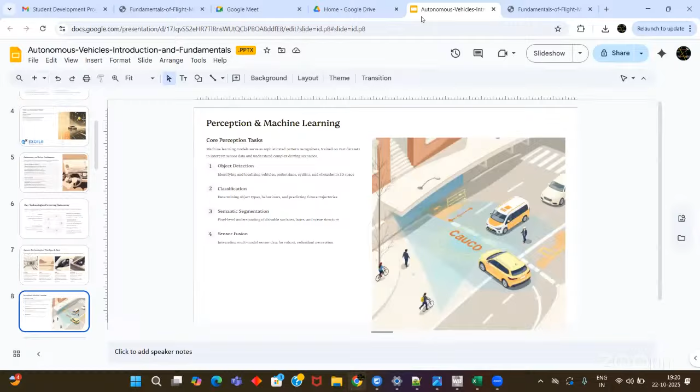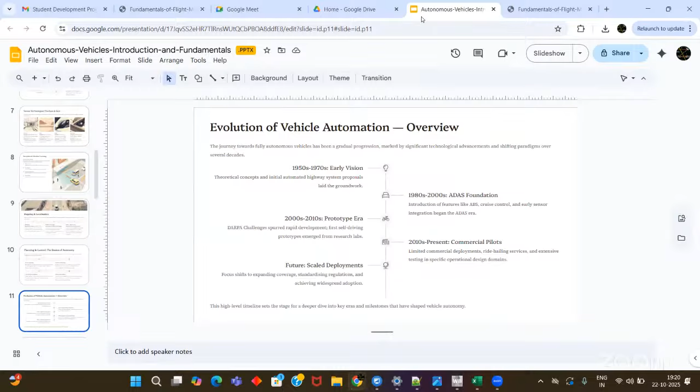Then planning and control, the brains of autonomy, which included route planning, behavior planning, trajectory generation, low-level control. That got subcategorized into global level and local level. Then we discussed the evolution of vehicle automation, from the early 1950s to current times and future scale deployments. Then the early milestones, the modern era, the commercial research acceleration, and the research trends.

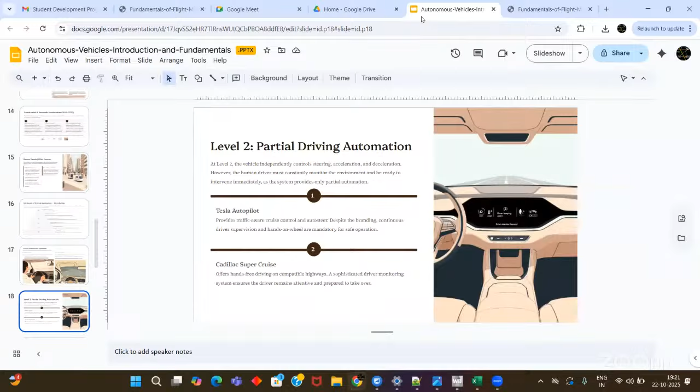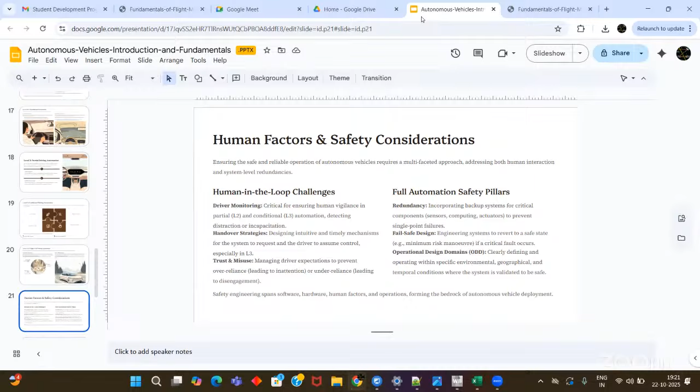Then the SAE levels, which included level zero and one, the foundational automation, then partial driving automation, conditional driving automation, and high and full driving automation. Then human factors and safety considerations, which included human-in-the-loop challenges, full automation, and safety pillars: enhanced safety, increased mobility access, economic efficiency, reduced congestion, environmental benefits.

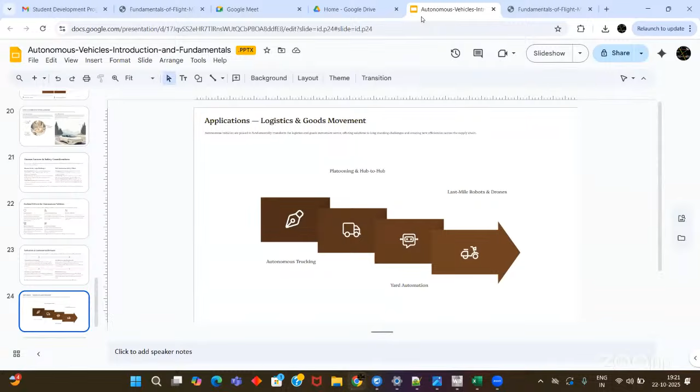So technical and commercial drivers, which included advanced sensors and compute, AI and machine learning breakthroughs, ride hailing and logistics demand, potential cost savings. So then we discussed the goods and the logistics and goods movement. So this was the complete thing that we were discussing in the last two classes. We discussed everything in detail. We also took time to understand the technical competencies that are required for electric vehicle design, the ground electric vehicle design, and its principles. So these were the things that we did in the last one.

Today's class we'll be discussing the aerial autonomous vehicles. So the aerial autonomous vehicles are the drones.

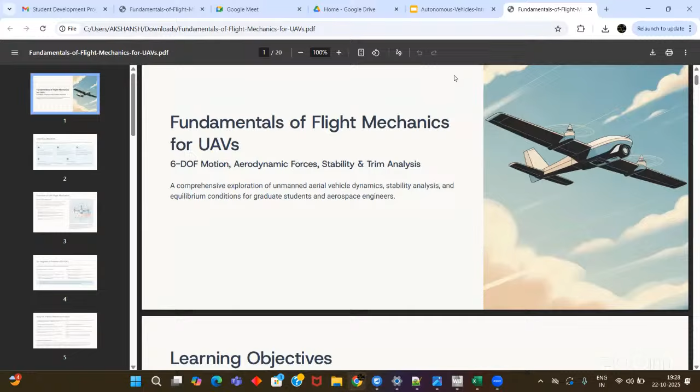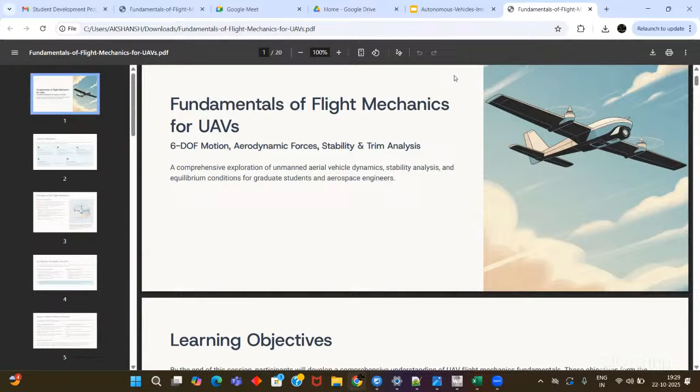So a comprehensive exploration of unmanned aerial vehicle dynamics, stability analysis, and equilibrium conditions for graduate students, be it electronic engineers or aerospace engineers. I have explained all that comes here. What is 6 degrees of freedom motion? What is an aerodynamic force? What is stability and what is trim? Those are basically a surface level of understanding of the moments and forces which are needed for aircraft and flight dynamics analysis.

Now the learning objectives. By the end of the session, participants will develop a comprehensive understanding of UAV flight mechanics fundamentals. These objectives form the foundation for advanced control system designs and autonomous flight operations. So basically, complete understanding of the flight mechanics helps you understand the control algorithm and, at a later stage, helps you design a fully autonomous flight control system. Everything is linked, and it lays a foundation in a proper networking manner, wherein you get a proper understanding of each concept and then take it into consideration in designing an autonomous flight operation.

So an autonomous flight operation is actually the design of a Pixhawk or a flight control system, which has different breadboard layers, coded using embedded C programming, wherein you can plug in your Pixhawk, make changes, track it, and make algorithm changes which will benefit your moments and forces and your flight operations. That governs the autonomous flight regime of the complete profile flying in air, and it will govern the complete system in a proper manner.

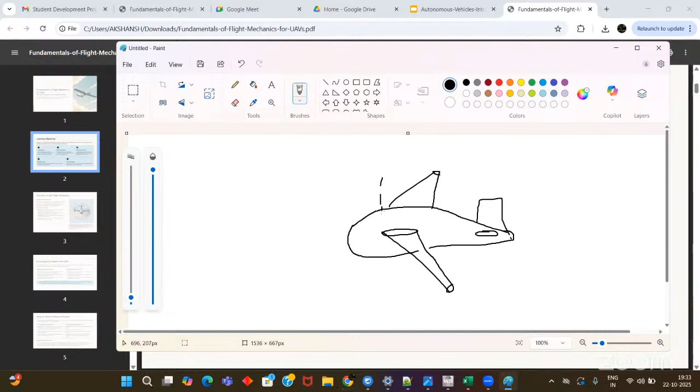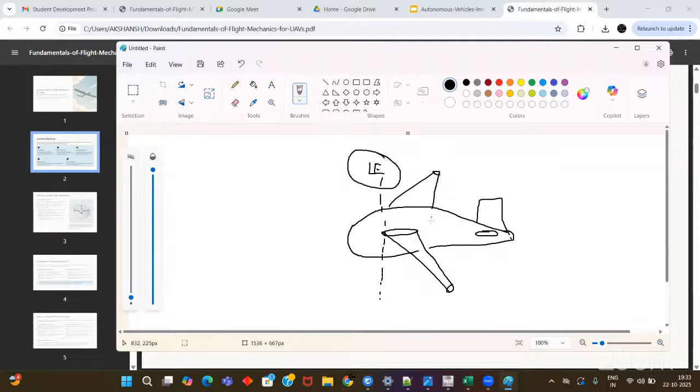So suppose this is your aircraft, and this is the leading edge of the wing. And this is the center of pressure or the aerodynamic center, where you observe and calculate your CL and CD, which we will do in the next class. This is the coefficient of lift and this is the coefficient of drag. These two are the aerodynamic parameters, and then you also observe the moment. This is the pitching moment CM.

This is the roll axis, and this is CM, and this is the yaw axis, that is CN. Sorry, this is CL, roll axis, and this is small l. So this is C and small l.

So basically, if you draw your axis here, so this is the Z axis, this is the Y axis, this is the X axis. Sorry, this is the Y axis, and this is the Z axis. So along the Z axis, the motion which is there is the yaw motion. Okay. Along the roll axis, the motion which is there is the roll motion, CL, small l. And the motion along the y-axis, which is there, is the pitch motion.

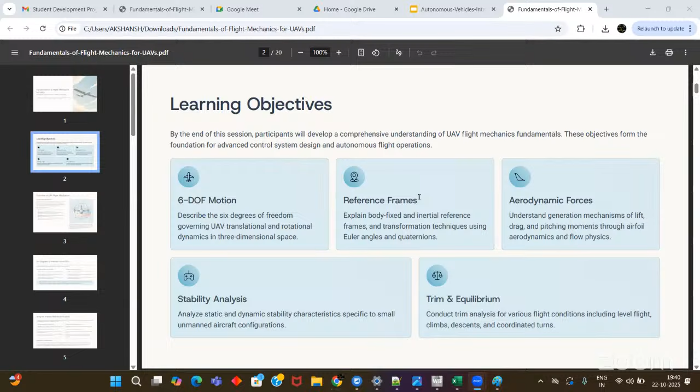So the first one is the trim that we already discussed, that in the pitching axis or in the longitudinal axis, an aircraft is trimmed properly. So trimming happens through an elevator. So you see it here. This is the horizontal tail, and the control surfaces here are the elevators. This is the wing, and the control surfaces attached to it are ailerons and flaps. So these are the ailerons, and these are the flaps. Okay. Then this vertical portion is the vertical tail, and this control surface attached to it is the rudder.

So here, the one that we are discussing is conducting a trim analysis for various flight conditions, including level flight, climbs, descents, and coordinated turns. So in this condition, actually, the flight profiles are... yeah, so we have discussed the trim part, right? So how the trimming of the aircraft actually governs the entire profile. The second one is including the level flight, then the climbs.

So climb is actually when the aircraft moves upwards in the air without changing the angle of attack, but the entire pitch of the aircraft moves up. So the entire aircraft, let me show you. So the aircraft moves like this. So this is the axis and this is the angle that it moves. So it moves up. So that is actually climbing up. Then a steady state level flight is actually when it moves forward, cruising, and that is the case.

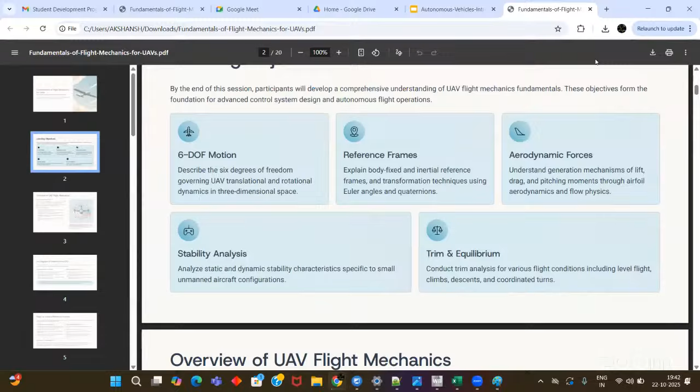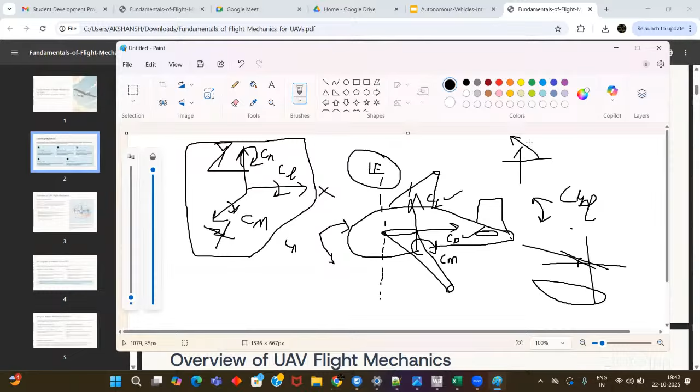And third is the descent when it comes down during the landing, and the coordinated turns. So during the banking, when the aircraft actually moves like this, turns, coming under the banking portion.

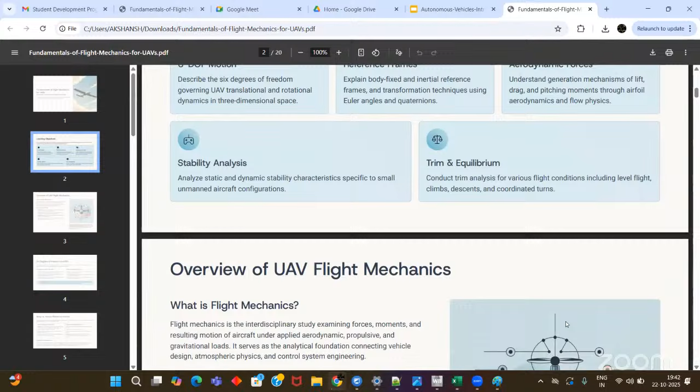Okay. So now we'll be discussing the overview of UAV flight mechanics. So, what is flight mechanics basically? Flight mechanics is the interdisciplinary study examining forces, moments, and resulting motion of aircraft under applied aerodynamic, propulsive, and gravitational loads. So flight mechanics is the interdisciplinary study which helps you to examine the forces, moments, and the resulting motion of the aircraft when the aerodynamic, propulsive, and gravitational loads are applied.

So it serves as the analytical foundation connecting vehicle design, atmospheric physics, and control systems to achieve autonomy in the engineering part. So all these things are clubbed together and make flight mechanics. Flight mechanics is not a very easy subject. I actually worked in flight mechanics. I am a flight mechanics engineer. It comes with a lot more understanding of different physics-based topics, including the design, the aerodynamics, the atmosphere physics, the control system, the autopilot, everything. We have to have an understanding of propulsion. Everything is needed.

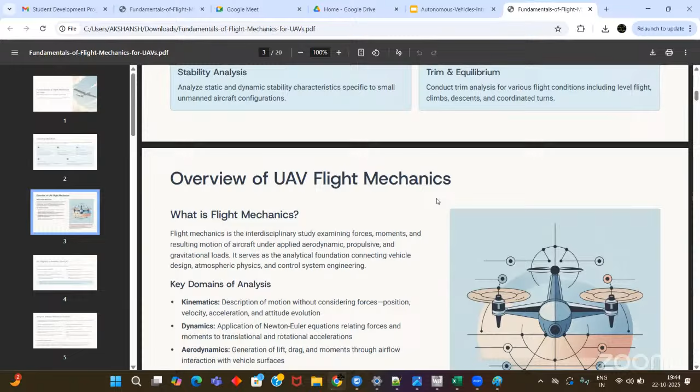So, what are the key domains of analysis? First is the kinematics: description of motion without considering forces, position, velocity, acceleration, and attitude evolution. These come under kinematics. Then comes the dynamics. Dynamics is the application of Newton and Euler equations relating forces and moments to translational and rotational accelerations. So these come under dynamics.

Now comes the aerodynamics part. The generation of lift, drag, and moments through airflow interaction with vehicle surfaces comes under aerodynamics. So aerodynamics is nothing but the evaluation and generation of lift, drag, and moments through airflow interactions with vehicle surfaces.

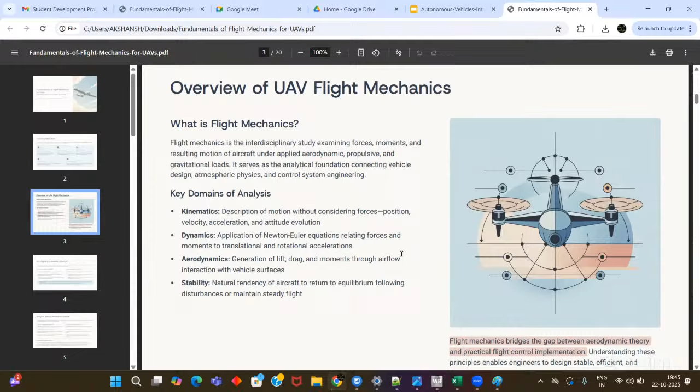Now comes the stability. Stability is the natural tendency of the aircraft to return to equilibrium following disturbances or maintain a steady flight. That's what I told you, that is trim. So the stability condition is important to evaluate and maintain the natural tendency of the aircraft to return to equilibrium following disturbances or maintain a steady state flight.

So flight mechanics bridges the gap between aerodynamic theory and practical flight control implementation. Understanding these principles enables engineers to design stable, efficient, and controllable systems. The flight mechanics part is very important, bridging the aerodynamics part, which includes lift generation and drag, and the practical flight control implementation, which helps the aircraft attain autonomy. So flight mechanics is a club of both things. A flight mechanics engineer has to understand both things in a close and coordinated way.

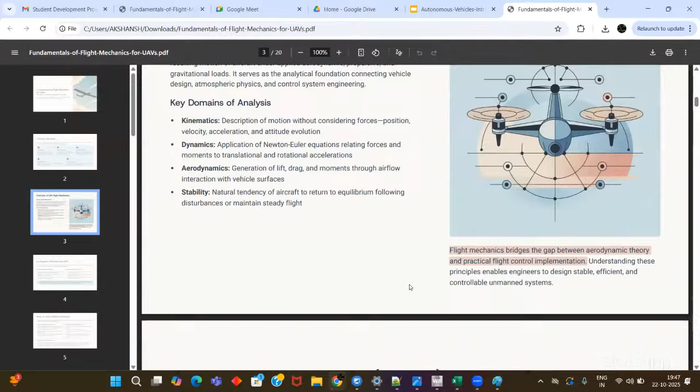The reason I'm explaining these things in an autonomy class is because they are very important to lay a foundation for your interest in automation. You'll have an understanding of what has to be learned before having a clear-cut understanding of the autonomy of the system, how to design an autonomous vehicle. Understanding these principles enables engineers to design stable, efficient, and controllable unmanned systems. Without understanding these concepts properly, you won't be able to design an unmanned system that can be controlled by complete automation or autopilot.

So now we'll be discussing what is six degrees of freedom, and everything about it. We have discussed the surface level knowledge about six degrees of freedom, and I'm not saying that I'll explain everything about it in this class, but at least I'll help you understand. Because of the time constraint and the nature of the class, which is online, I cannot help you understand the entire loop of the scenario in a proper way with equations.

But I'll try to help you understand about the same in a proper way so that you can go home and after that you can have an understanding about the same reading books. So I'll tell you different books. So you can refer to R.C. Nelson, Robert Nelson. You can write that book, R.C. Nelson. Then you can write Daniel P.

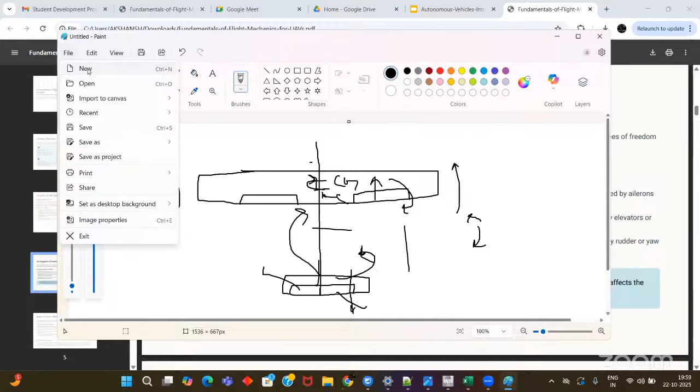So suppose this is the vertical tail, right? This is the vertical tail, and this is the rudder. Okay, so when the aircraft is seen like this, this deflects this side and this side, actually to turn the aircraft to this and this. If you view the aircraft from the back, it turns like this, and it turns like this, through the yawing mechanism.

So, critical coupling. Translational and rotational motions are strongly coupled in UAV dynamics. For example, a pitch rotation directly affects the heave velocity, whereas roll rotation influences both sway and yaw rates through aerodynamic cross coupling effects. So, that is it.

So you can ask questions for 2 minutes. I'll wait for 2 minutes, and then you can post your questions if you have. Otherwise, we'll move forward. Yeah, please. Don't have any questions? Everything is clear. XLR team, you can hear me, right? XLR team, can you hear me? Any student, can you please respond if you can hear me or not? Co-host, can you hear me? Ishant, can you hear me now? Am I audible, right, Ishant? Okay, okay. Thank you so much.

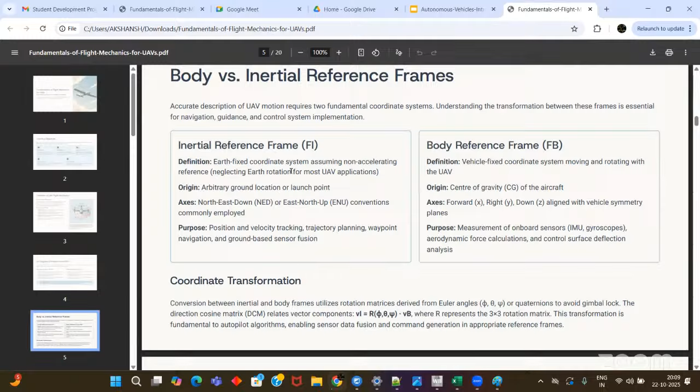Now, equations of motion. That is the overview that we are giving here. I'm telling you the physics in a very subtle manner so that you generate your own interest and study it at your own end, so that while doing an automation design of the control system, you can understand the parameters being talked about properly, and thereafter you can take decisions on how to approach the problem in a proper way.

The complete dynamics of a rigid body UAV are governed by the Newton-Euler equations, which relate applied forces and moments to resulting translational and rotational accelerations. These equations form the mathematical foundation for flight simulation, stability analysis, and control system design. Translational dynamics: Newton's second law in vector form, force equals mass into acceleration, where sigma F is the vector sum of all external forces, aerodynamic, propulsive, and gravitational. m is the vehicle mass, and a is the acceleration of the center of gravity.

In component form along the body axes, x-axis: Fx = m(u dot + qw − rv). So this is the x-direction breakup. In the y-axis, Fy = m(v dot + ru − pw). Z-axis: Fz = m(w dot + pv − qu). So this is the z-axis breakup.

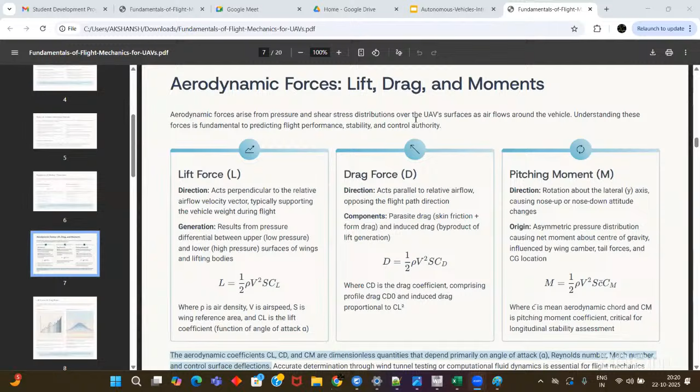Okay, so let me again do the lift curve and drag polar. So in the lift,

Stellar Ethic team, can you please say that you can hear me properly? It's a general request. I've been asking them so much of the time. They're not replying to it. So can you please tell me whether you can hear me properly or not? Stellar team. Co-host, can you please say? Huh? Sorry? Maybe you are audible. Okay, I've been asking them so much of the time to actually respond to it. You can hear me properly, right? Yes, yes, you are clear.

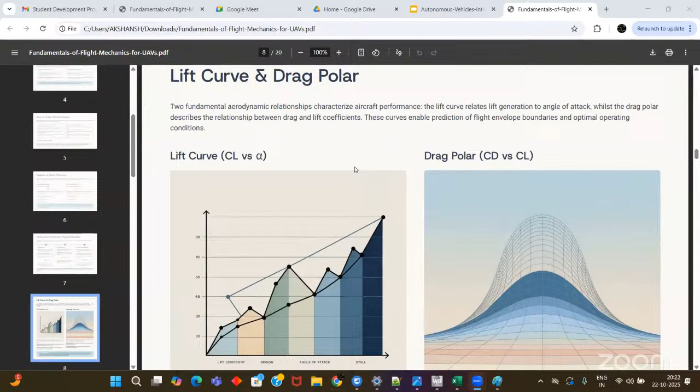Okay, thank you. So now we'll be discussing the lift curve and drag polar. Two fundamental aerodynamic relationships characterize aircraft performance. The lift curve relates lift generation to the angle of attack, and the drag polar describes the relationship between the drag and lift coefficients. These curves enable prediction of flight envelope boundaries and optimal operating conditions. So, lift curve, that is CL versus alpha, drag polar, that is CD versus CL. This is the drag polar and this is the lift curve.

Linear region: at low to moderate angle of attack, typically between -5 to 12 degrees for a conventional airfoil, CL increases linearly with alpha, following CL is equal to CL naught plus CL alpha into alpha. Lift curve slope: the derivative dCL by d alpha, typically 0.1 per degree or 5.7 per radian for a symmetrical airfoil, represents the aerodynamic efficiency. Stall: beyond the critical angle of attack, alpha stall between 12 to 16 degrees, flow separation causes abrupt CL reduction and loss of lift.

Now drag polar, or CD versus CL. Parabolic relationship: the drag coefficient follows CD is equal to CD naught plus K CL squared, where CD naught is the zero lift drag and K is the induced drag factor. Minimum drag point occurs at the CL for best glide ratio, representing the most efficient cruise condition. Performance metrics.

Maximum L by D ratio indicates aerodynamic efficiency and occurs at CL equal to square root of CD naught by K. So the engineering application of it is that the drag polar determines critical performance parameters, including maximum endurance speed, or minimum power, occurring at maximum CL power 3 by 2 by CD, and maximizing the range, that is minimum drag at maximum L by D.

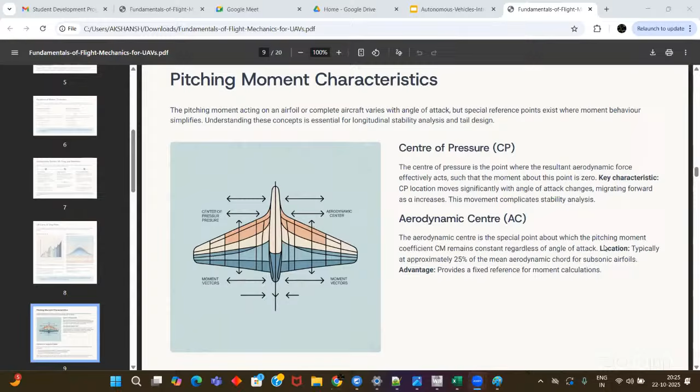So aerodynamic center, that is AC, is the special point about which the pitching moment coefficient CM remains constant regardless of the angle of attack change. Its location is typically at approximately 25% of the mean aerodynamic chord for subsonic airfoils. The advantage is it provides a fixed reference for moment calculation. So its importance for longitudinal stability is what we'll be discussing here.

The relationship between the aerodynamic center, center of pressure, and center of gravity determines the aircraft's static longitudinal stability. For positive static stability, the center of gravity must be located ahead of the aerodynamic center, that is the neutral point. The neutral point is the aerodynamic center of the aircraft. Horizontal tail surfaces generate restoring moments to counteract disturbances. The moment coefficient derivative, dCm by d alpha, must be negative. The slope should be negative.

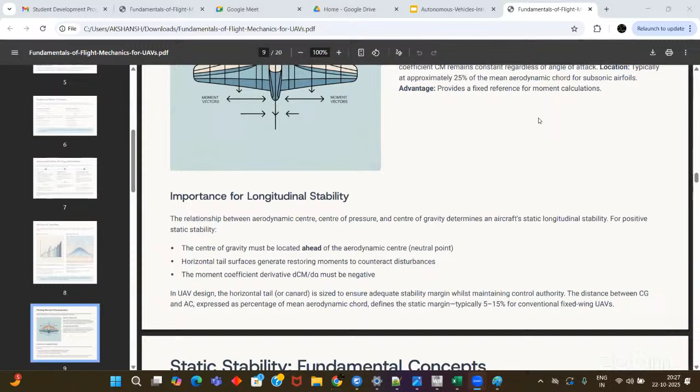In UAV design, the horizontal tail or canard, where a canard is the horizontal tail ahead of the wing and the horizontal tail is the conventional tail behind it, is sized to ensure adequate stability margin while maintaining control authority. The distance between CG and AC expressed as a percentage of mean aerodynamic chord defines the static margin, which typically should be between 5 to 15% for conventional fixed-wing UAVs.

Static stability, fundamental concepts. Static stability describes an aircraft's initial response immediately following a disturbance from equilibrium flight. It represents the vehicle's inherent tendency to generate restoring forces and moments without pilot or autopilot intervention. Stability classifications. Positive static stability: the aircraft generates forces and moments opposing the disturbance, tending to return toward the original trim condition. Example, a nose-up disturbance creates a nose-down restoring moment.

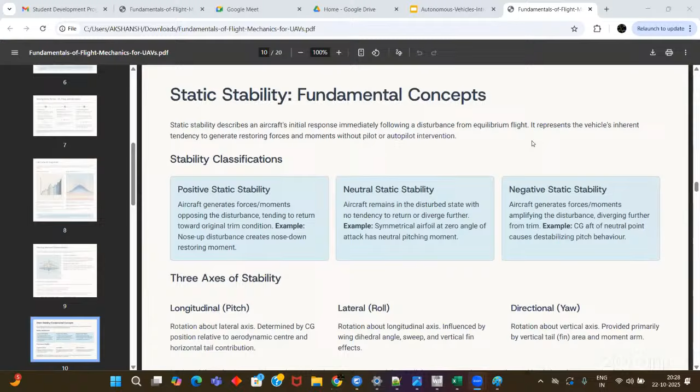Neutral static stability: the aircraft remains in the disturbed state with no tendency to return or diverge further. Example, a symmetric airfoil at zero angle of attack has neutral pitching moment. Negative static stability: the aircraft generates forces and moments amplifying the disturbance, diverging further from trim. Example, CG aft of the neutral point causes destabilizing pitch behavior.

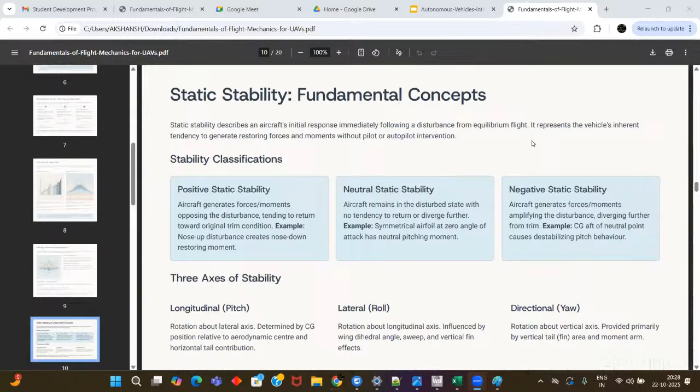Three axes of stability. First is longitudinal, that is pitch. Second is lateral, that is roll. Third, directional, that is yaw. Longitudinal, or pitch, is rotation about the lateral axis, determined by CG position relative to the aerodynamic center and horizontal tail contribution. Lateral, or roll, is rotation about the longitudinal axis, influenced by wing dihedral angle, sweep, and vertical fin effects. Directional, or yaw, is rotation about the vertical axis, provided primarily by vertical tail fin area and moment arm.

So, design philosophy: most UAVs are designed with positive static stability in all three axes to reduce autopilot workload, though some agile platforms intentionally relax stability for enhanced maneuverability with fly-by-wire augmentation. So longitudinal static stability. Longitudinal static stability ensures that the aircraft naturally resists pitch disturbances and tends to return to the trimmed angle of attack. This is the most critical stability mode for fixed-wing UAVs, directly affecting handling qualities and autonomous flight capability.

Mathematical stability criteria: an aircraft possesses positive longitudinal static stability if and only if dCm/dα is less than zero, that is, a negative slope. This condition states that the pitching moment coefficient must decrease with increasing angle of attack. Physically, when the aircraft pitches nose up, alpha increases. A negative, nose-down restoring moment must develop to counteract the disturbance.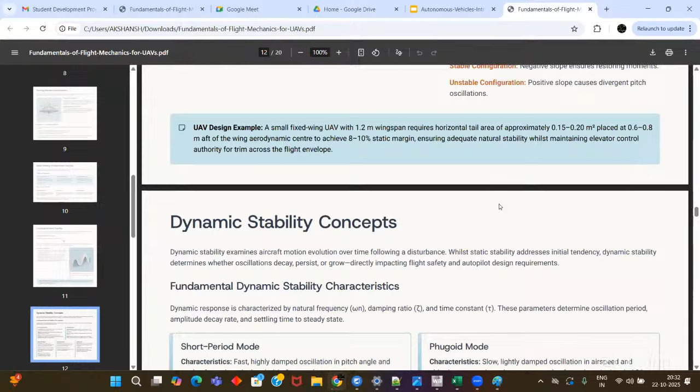Now, dynamic stability concept. Dynamic stability examines aircraft motion evolution over time following a disturbance. Static stability actually addresses initial tendency. Dynamic stability determines whether oscillations decay, persist, or grow, directly impacting flight safety and autopilot design requirements.

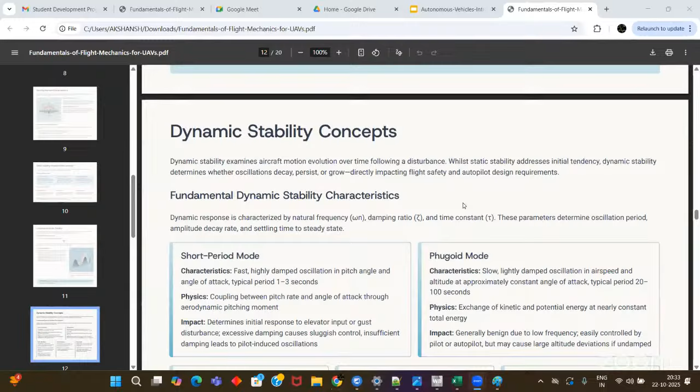Fundamental dynamic stability characteristics. So dynamic response is characterized by natural frequency omega, damping ratio zeta, and time constant tau. These parameters determine oscillation period, amplitude decay rate, and settling time to steady state. Short period mode: characteristics are fast, highly damped oscillation in pitch angle and angle of attack; typical time period is between 1 to 3 seconds. Okay, so physics is coupling between pitch rate and angle of attack through aerodynamic pitching moment. Impact: determines initial response to elevator inputs or gust disturbance.

Excessive damping causes sluggish control. Insufficient damping leads to pilot induced oscillations. Phugoid mode: characteristics are slow, lightly damped oscillation in airspeed and altitude at approximately constant angle of attack; typical time period is between 20 to 100 seconds. Physics is exchange of kinetic and potential energy at nearly constant total energy. Impact is generally benign due to low frequency, easily controlled by pilot or autopilot, but may cause large altitude deviations if undamped.

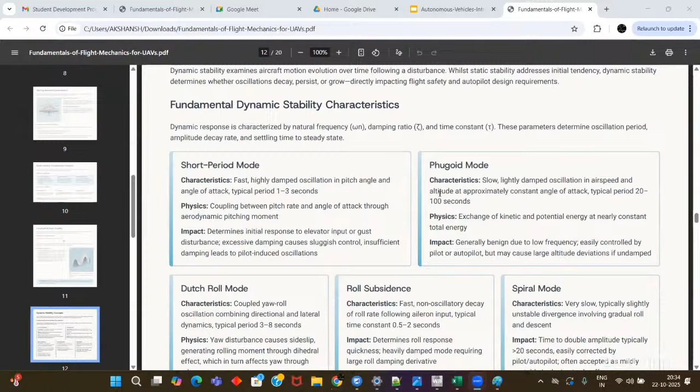So Dutch roll mode. Characteristics are coupled yaw-roll oscillation combining directional and lateral dynamics. Typical period is between 3 to 8 seconds. Physics: yaw disturbance causes sideslip, generating rolling moment through dihedral effect, which in turn affects yaw through adverse yaw. In practice, must be well damped for acceptable handling. Yaw dampers are commonly employed in autopilots.

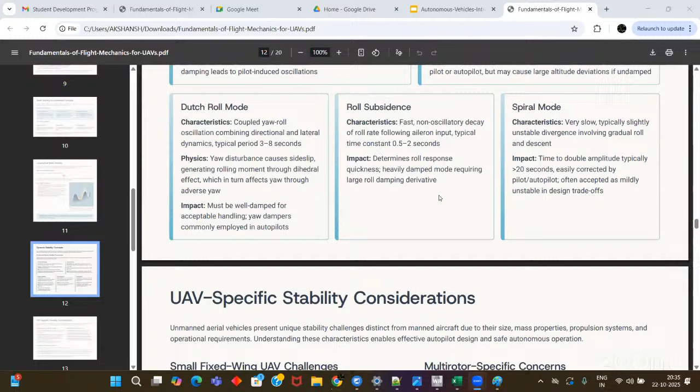Roll subsidence. Characteristics are fast, non-oscillatory decay of roll rate following aileron input. So the aileron actually controls the roll. Typically, the time constant lies between 0.5 to 2 seconds. In practice, determines roll response quickness. Heavily damped mode requires a large roll damping derivative. Spiral mode: characteristics are very slow, typically slightly unstable divergence involving gradual roll and descent. In practice, time to double amplitude is typically greater than 20 seconds, easily corrected by pilot or autopilot, often accepted as mildly unstable in design trade-offs.

UAV-specific stability considerations. Unmanned aerial vehicles present unique stability challenges distinct from manned aircraft due to their size, mass properties, propulsion system, and operational requirements. Understanding these characteristics enables effective autopilot design and safe autonomous operation. Small fixed-wing UAV challenges: low Reynolds number aerodynamics, that is Re less than 5 lakh, results in laminar separation bubbles, reduced lift curve slopes, and degraded stability derivatives. Reduced inherent damping, lower wing loading, and smaller moments of inertia lead to lightly damped modes requiring active stabilization.

High agility requirements, that is, mission requirements often favor maneuverability over natural stability, necessitating relaxed static stability with controlled augmentation. Gust sensitivity: low wing loading makes small UAVs highly susceptible to atmospheric turbulence and wind shear. Multi-rotor specific concerns: inherent instability, that is, open loop unstable in all the axes, requiring continuous active stabilization at rates

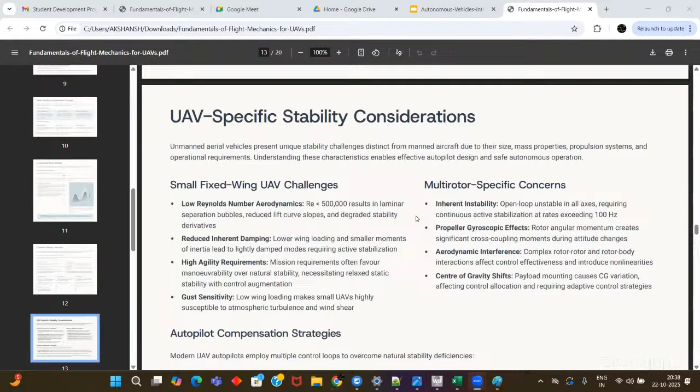So these are the things that actually control your small fixed wing UAVs and multi-rotor specific UAVs. So basically, low inherent damping, high agility requirement, gust sensitivity, inherent instability, propeller gyroscope effects, aerodynamic interference, and center of gravity shift. So these are the things.

Autopilot compensation strategies, where modern UAV autopilots employ multiple control loops to overcome natural stability deficiencies. Inner loop, that is rate stabilization: high bandwidth feedback of angular rates, that is PQR, provides artificial damping, typically operating at 50 to 200 Hz.

Middle loop, that is attitude control, maintains desired roll, pitch and yaw angles through proportional integral derivative, that is PID, or model-based control. Outer loop, that is position control, tracks desired flight path using GPS and inertial navigation,

commanding appropriate attitude references. So this sophistication of autopilot algorithms allows UAVs to operate with configurations that would be unflyable for human pilots, enabling optimized designs for specific mission requirements rather than adherence to classical stability margins. Okay. Trim and equilibrium, that is foundational concepts.

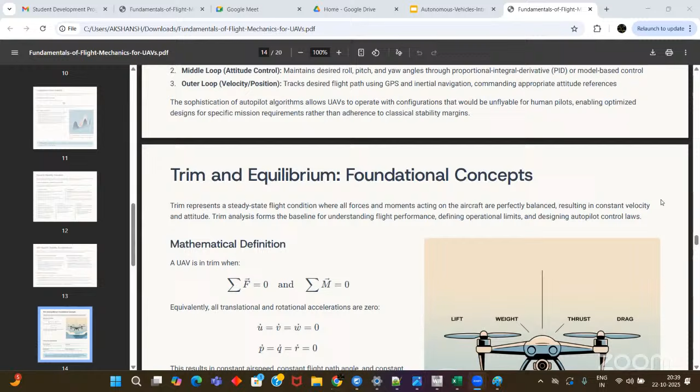So till this point, if anybody is having any doubts, please tell. It is a very heavy session for me as well. A lot of things are there to help you understand it, and it is a very time-based, online-based course. So a lot of technical things are there. Can you please post it in the group if you have any problems? Just 2 minutes. Any doubts from your side? So okay, let me start. I think you're not listening to it, or you're not interested in it, or I don't know why you're not asking questions.

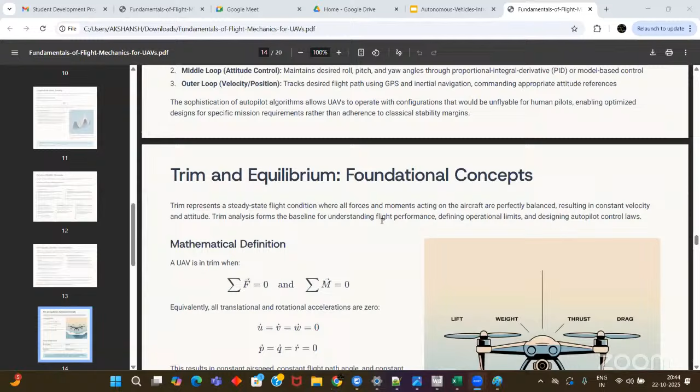So trim and equilibrium, that is the foundational concepts. Trim represents a steady state flight condition where all the forces and moments acting on the aircraft are perfectly balanced, resulting in a constant velocity and attitude. Trim analysis forms the baseline for understanding flight performance, defining operational limits and designing the autopilot control laws. So autopilot control laws are actually designed on the trim methodology.

So mathematical definition: a UAV is in the trim state when the sigma of force summation is zero and sigma of moment summation is zero. Okay. So this is the moment thing, and this is the force thing for the complete equilibrium condition. Equivalently, all translational and rotational accelerations are zero.

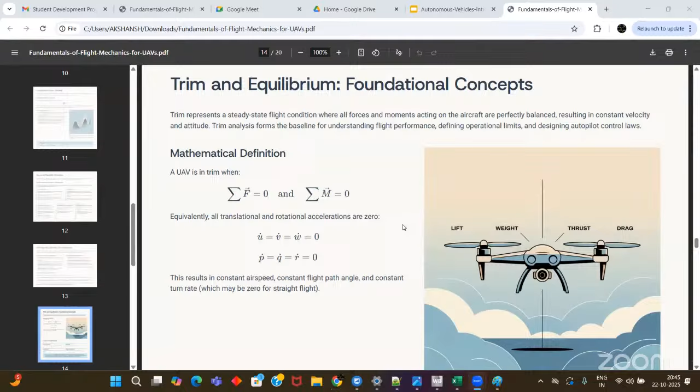That is u dot, v dot, and w dot are zero. P dot, q dot, and r dot are zero. This results in a constant airspeed, constant flight path angle, and constant turn rate, which may be zero for straight flight. So these are the things.

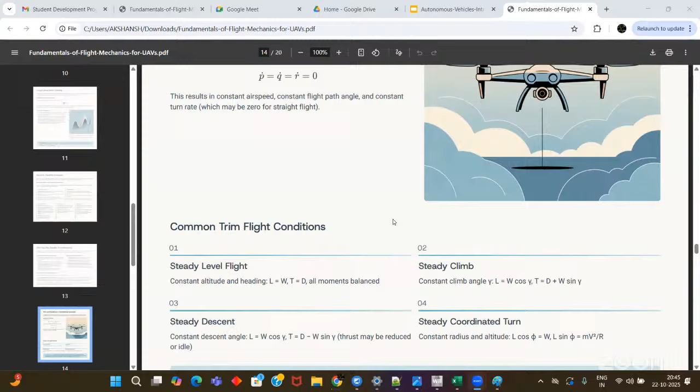So common trim flight conditions are steady level flight, that is constant altitude and heading, where lift is equal to weight and thrust is equal to drag, and all moments are balanced. Second is the steady climb, that is constant climb angle, where lift is equal to W cos gamma, where gamma is the flight path angle, and thrust is equal to D plus W sin gamma.

Steady descent: constant descent angle, where lift is equal to W cos gamma and thrust is equal to D minus W sin gamma. Right? Thrust may be reduced or idle. Now steady coordinated turn: constant radius and altitude, L cos phi is equal to W and L sin phi is equal to mV square by R. That is centrifugal.

So the engineering significance of these: trim conditions serve as operating points for linearization of equations of motion, enabling stability derivative calculation and linear control system design. Autopilots typically maintain trim through small control surface deflections, that is elevator deflection delta E, aileron deflection delta A, rudder deflection delta R, that vary with airspeed, altitude, and configuration changes such as flap deployment or landing gear extension.

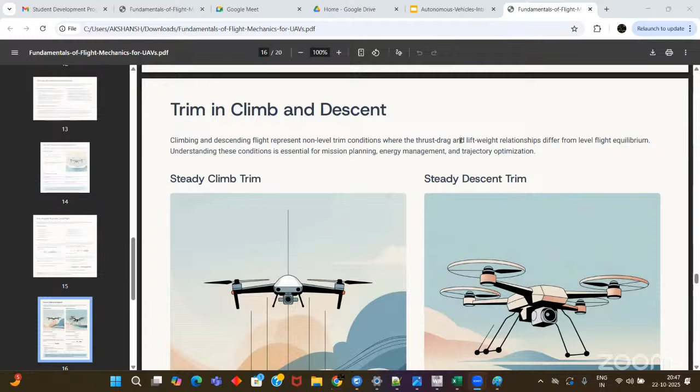Okay. Now trim analysis example for a level flight. So this example we'll discuss in tomorrow's class. Before that, we can do trim in climbing and descending flight. So climbing and descending flight represent non-level trim conditions where the thrust, drag, and lift-weight relationships differ from level flight equilibrium. Understanding these conditions is essential for mission planning, energy management, and trajectory optimization.

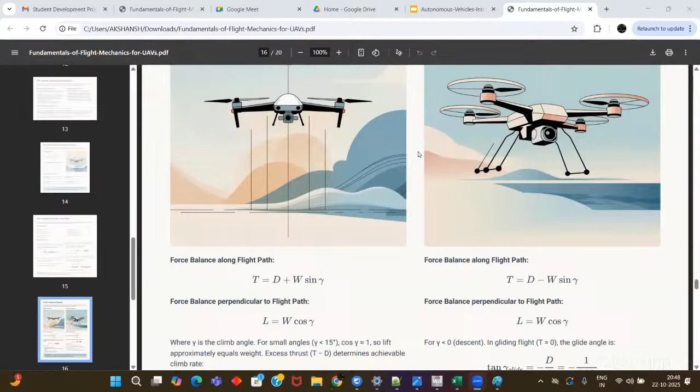So steady climb trim and steady descent trim are the two cases where force balancing along the flight path looks like T is equal to D plus W sin gamma and L is equal to W cos gamma, where gamma is the climb angle. For small angles, gamma less than 15 degrees, cos gamma is approximately equal to 1. So lift approximately equals weight. Excess thrust T minus D determines achievable climb rate. Now R/C is equal to V sin gamma, that is (T minus D) into velocity by W.

Key characteristics are: requires thrust greater than drag. Angle of attack increases slightly due to reduced effective airspeed component. Best climb angle occurs at maximum T minus D. Best climb rate occurs at maximum (T minus D) into velocity by weight. In descent, force balance along the flight path is T is equal to D minus W sin gamma. Force balance perpendicular to the flight path is lift is equal to W cos gamma.

Flight path angle less than zero is descent. In glide flight, T is equal to zero. The glide angle is tan gamma glide equal to minus D by L, which is equal to minus one by L/D. Key characteristics are thrust less than drag, or zero for unpowered glide. Potential energy converts to kinetic energy, speed increases, or dissipates as drag. Best glide angle at maximum L/D ratio. Minimum sink rate occurs at a different airspeed than best glide angle.

So energy management. Climb performance is limited by available excess power, P available minus P required. Descent can be controlled through throttle reduction, increased drag, spoilers, higher angle of attack, or forward slip maneuvers. UAV autopilots must account for these energy state changes when planning vertical trajectories to meet waypoint, altitude, and timing constraints.

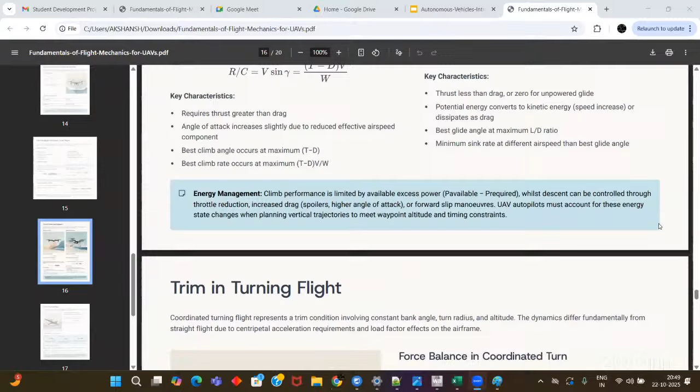So we'll discuss trim in turning flight in the next class tomorrow. And also before that, we'll be discussing the trim analysis example in level flight in tomorrow's class.